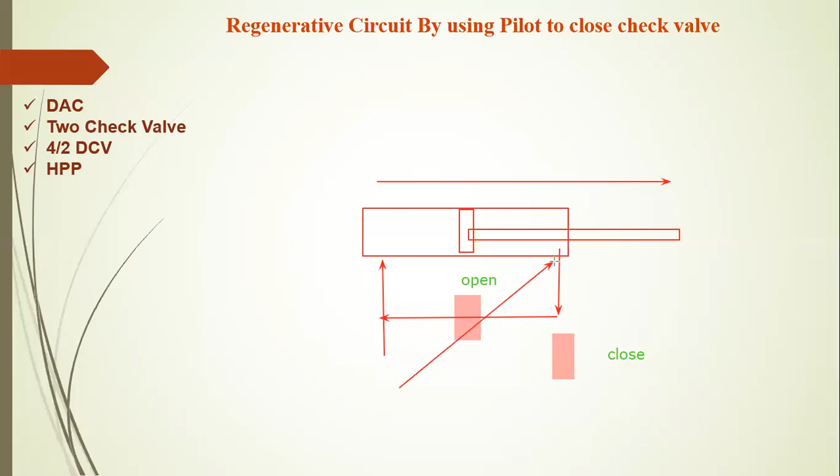But in the reverse position, if we give the flow from here and return from here, this is the retract condition. At this time we close this position and allow flow in the reverse direction to the hydraulic tank. That's called a regenerative circuit using a pilot to close check valve. It's compulsory for a regenerative cycle.

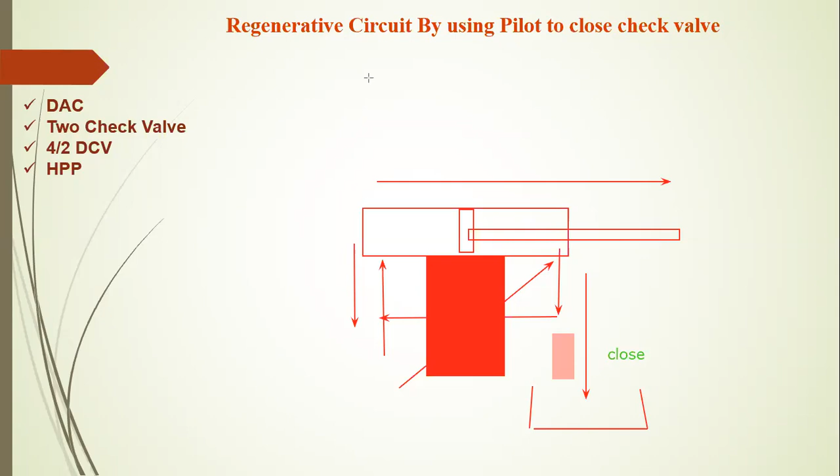Let's start the drawing and see how it works. For the regenerative circuit with pilot close, the required components are a hydraulic power pack, containing one hydraulic tank, hydraulic motor and pump set, and one pressure relief valve. Then we require one 4x2 direction control valve, two check valves and one double acting cylinder.

Let's start the drawing. Always start the drawing from the bottom side of the circuit. Here I draw the hydraulic tank. Then we require one hydraulic pump and hydraulic motor set. Let me draw the hydraulic pump and hydraulic motor set. Give the dark side inside the circle, so it indicates that it's on the hydraulic side.

This dark triangle indicates that it is a hydraulic part. Both the hydraulic pump and hydraulic motor are interconnected. Then draw one pressure relief valve as part of the HPP. One line of the HPP is directly connected to the hydraulic tank.

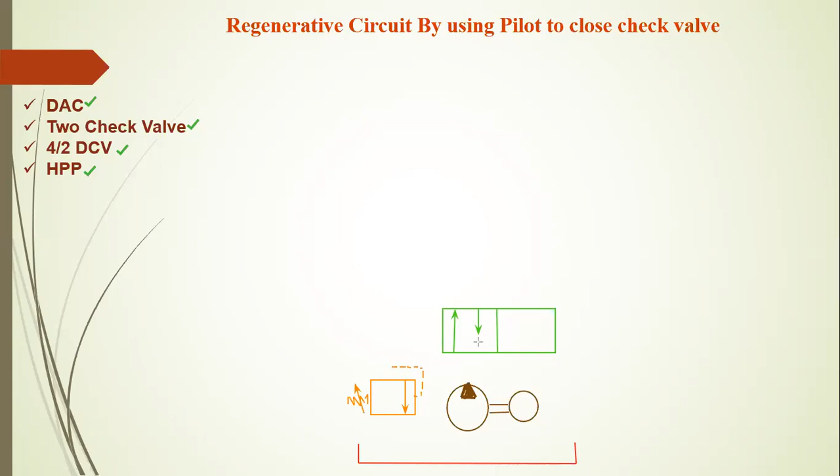Then draw the 4 by 2 direction control valve. Here I draw one 4 by 2 direction control valve. Give two positions for the direction control valve: one position with parallel in and parallel out condition, and the other with cross in and cross out condition.

Always remember to give the direction control valve actuation on both sides. Here I give one side operated by cam or follower, and the other side operated by spring. This is a 4 by 2 direction control valve.

Then we require one double acting cylinder. Let's draw the double acting cylinder. Here is given one piston arrangement in between, with a connecting rod, piston and working position.

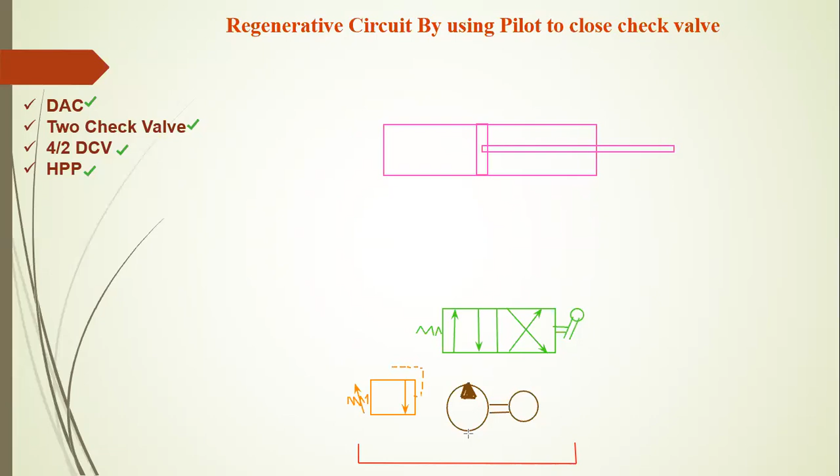Let's connect all the hydraulic component parts with a hydraulic line, and in between we add two check valves. So let's start to connect all the components with one hydraulic line. First, the hydraulic pump is connected directly to the hydraulic tank. Then the pressure relief valve is connected in parallel to the hydraulic pump, and the pressure control valve output is also connected with the hydraulic tank.

Then the oil passes from the hydraulic pump to the direction control valve, and from the direction control valve into the double acting cylinder in the first position. Here in the first position the oil passes from the tank to the pump to the direction control valve, and from the direction control valve to the double acting cylinder.

Then the oil from the other side is returned through the direction control valve into the tank. So connect this return from the direction control valve to the tank. Here we attach one check valve in the hydraulic circuit line at the end of the cylinder, on the other side of the cylinder.

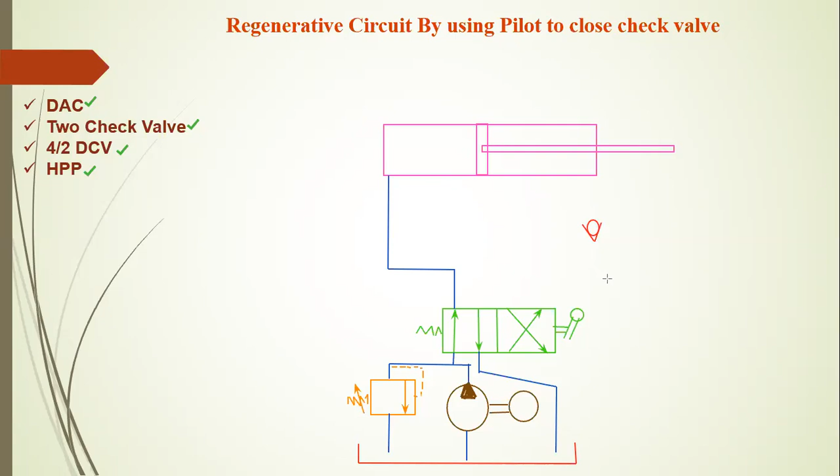So I have drawn one check valve here, because the return position from the outlet of the DAC is controlled or closed, so we require one check valve at the outlet of the double acting cylinder. Let's connect this check valve.

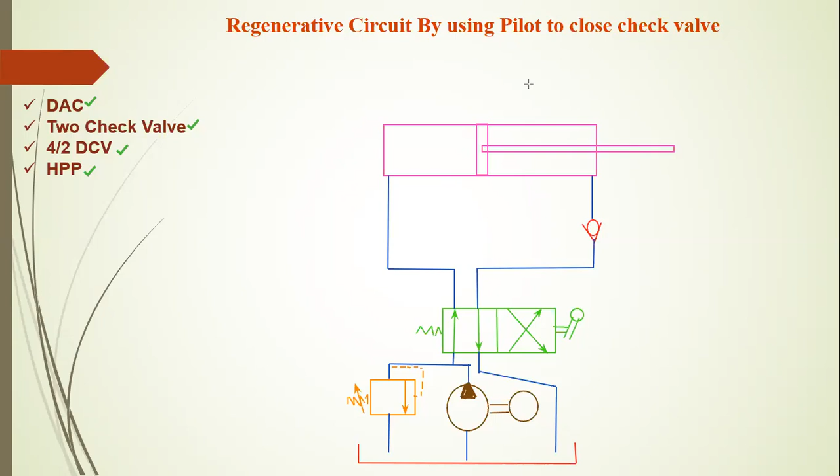This is the drawing. We have to attach one check valve, then the required operating condition for the regenerative side. So we give one check valve between the inlet and outlet of the DAC. So here is where we have to attach one check valve.

Here I draw one check valve, and attach this check valve line with the in and out condition of the double acting cylinder. That's the complete drawing. Give one bypass line to the check valve. If any problem is created and the check valve is not operated, then the bypass line is attached from the outlet of the check valve to the out of the DAC.

Give the name for all the component parts. Here connection P is connected to the hydraulic pump. Here connection T is connected to a tank. A and B are connected directly to the hydraulic circuit and attached to C and D at the double acting cylinder. Here give M for motor.

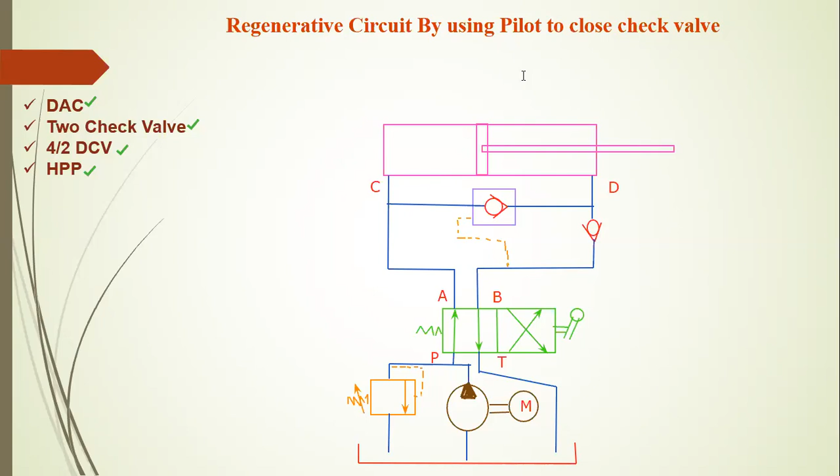Let's check how it works. Here the first position, we have to write here, first position is no pilot pressure. We are not giving a pilot pressure. Here is the no pilot pressure condition. We have to remember that position. No pilot pressure is working at this time. And let's start to understand how the circuit works.

Let's start. The hydraulic oil passes from the hydraulic pump and then passes into the direction control valve. From the direction control valve, oil passes into the double acting cylinder and the double acting cylinder moves in the right hand side direction. But in a regenerative condition, the excess oil removed from the D position, or out from the other side of the double acting cylinder, is drained from this line.

At this time here, that check valve is closed. Here these valves are in a closed condition, meaning oil does not pass from this position, so the oil passes this way and that valve is open. This check valve is open and oil passes into this position and enters at the first side of the double acting cylinder. So it moves the piston cylinder arrangement.